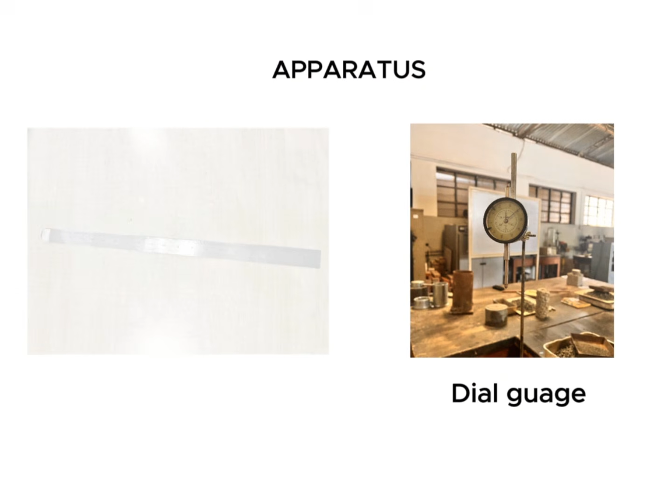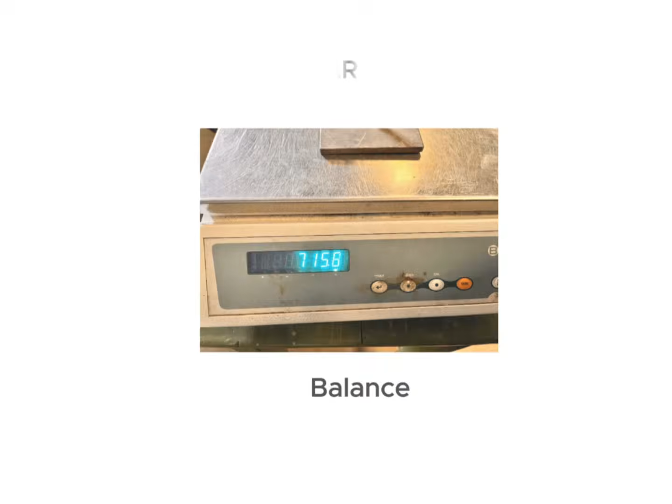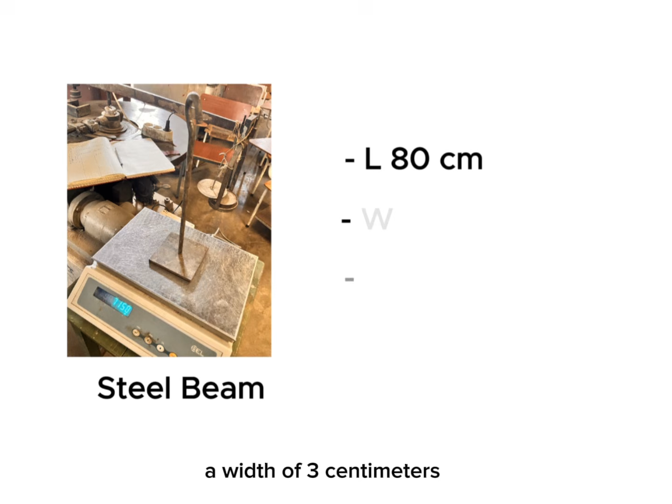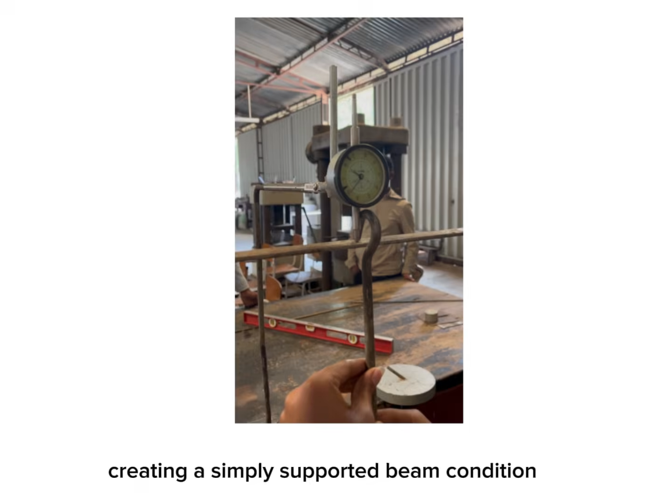Simply supported beam with central point load. To begin the experiment, a mild steel beam with a length of 80 centimeters, a width of 3 centimeters, and a thickness of 3 millimeters was selected for testing. The beam was placed on 2 supports at both ends, creating a simply supported beam condition. The supports were carefully aligned to ensure stability throughout the experiment.

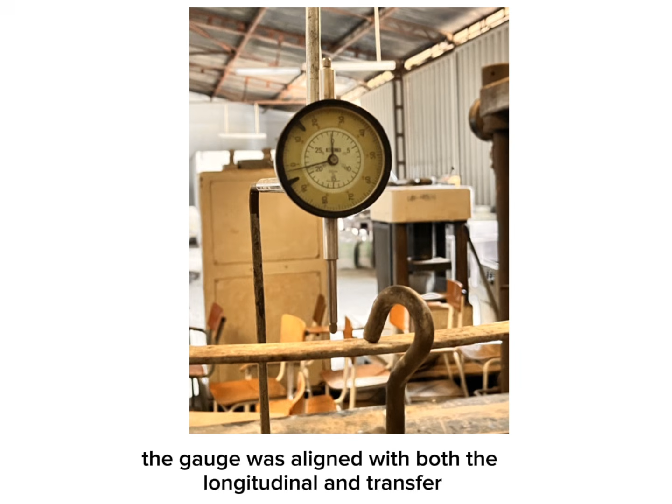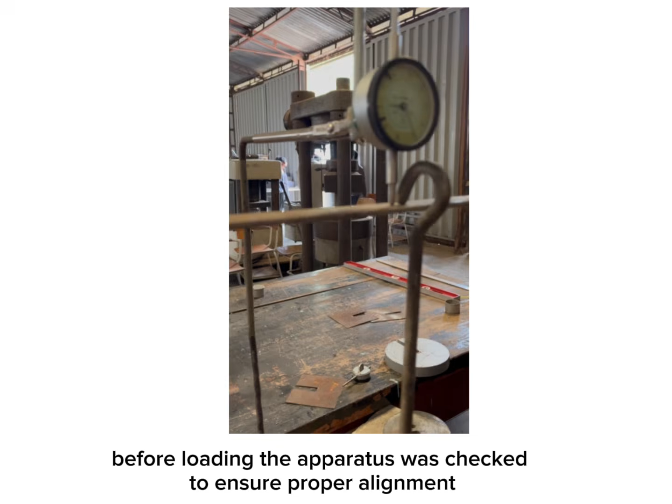Next, a dial gauge was positioned precisely at the center of the beam span. The gauge was aligned with both the longitudinal and transverse center lines of the beam to accurately measure the vertical deflection. The loading hook was also positioned at the center so that the applied load would act exactly at mid-span. Before loading, the apparatus was checked to ensure proper alignment and to minimize measurement errors.

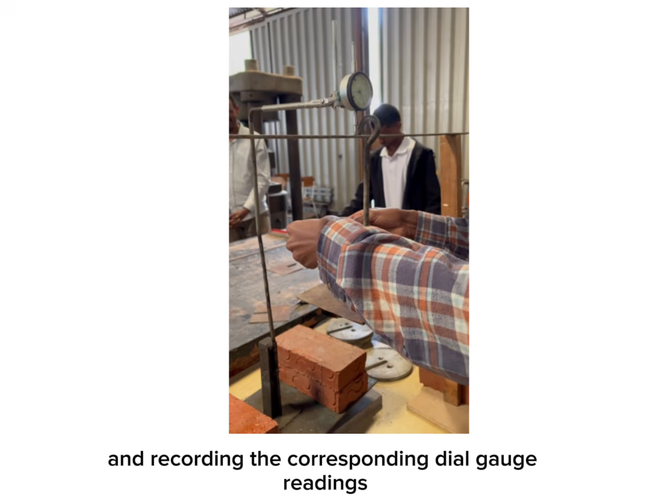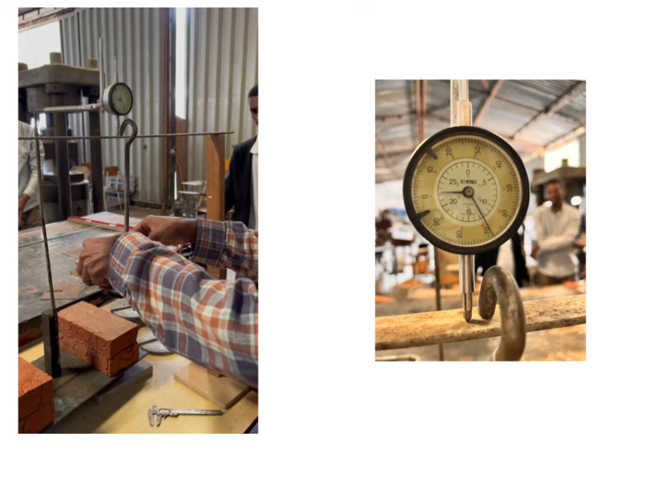The experiment was then carried out by gradually applying loads at the center of the beam and recording the corresponding dial gauge readings. For the first loading stage, a load of 1.0469 kilograms was applied. After the beam stabilized under the load, the dial gauge reading was recorded as 22 plus 68.9 divisions. The load was then increased by adding an additional 1 kilogram, bringing the total load to 2.0469 kilograms. The resulting dial gauge reading was recorded as 20 plus 37 divisions.

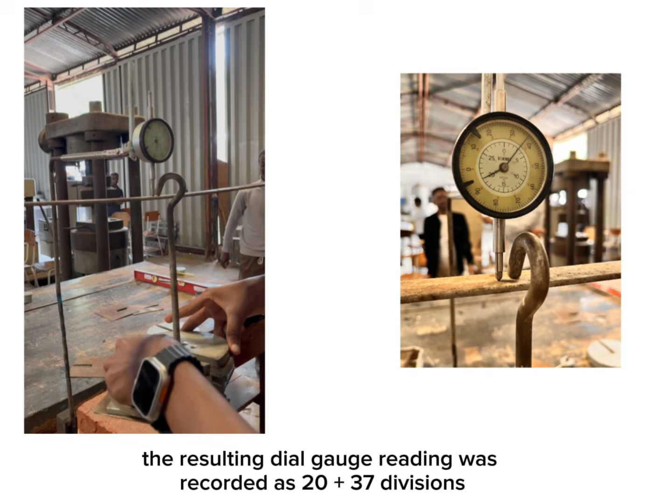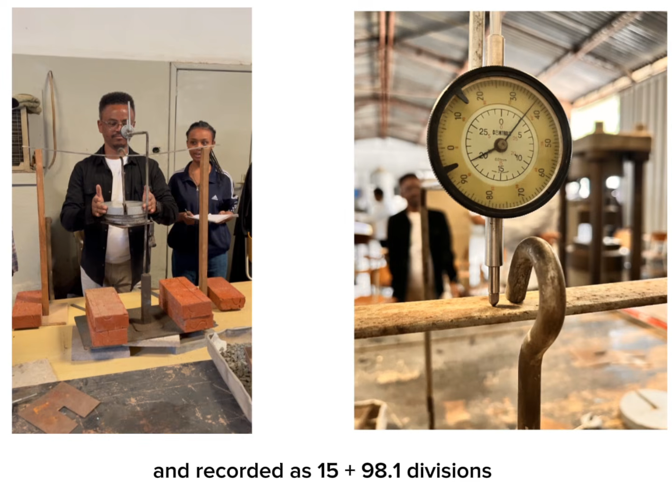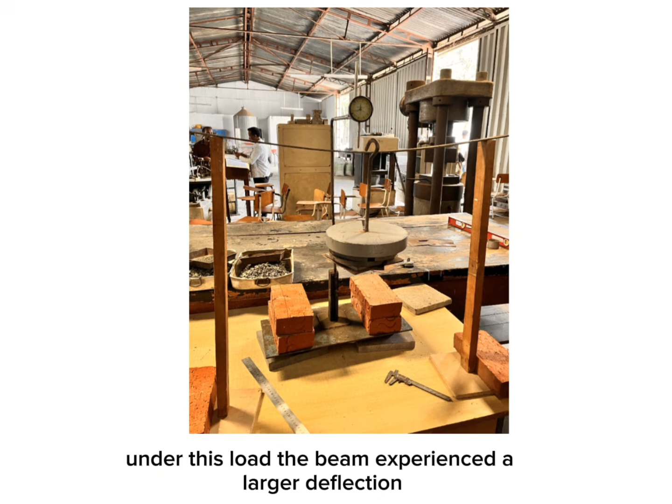For the third loading stage, an additional 2 kilograms were added, increasing the total load to 4.0469 kilograms. The dial gauge reading was observed and recorded as 15 plus 98.1 divisions. The loading process continued by adding 4 more kilograms, resulting in a total load of 8.0469 kilograms. Under this load, the beam experienced a larger deflection, and the dial gauge reading was recorded as 8 plus 50 divisions.

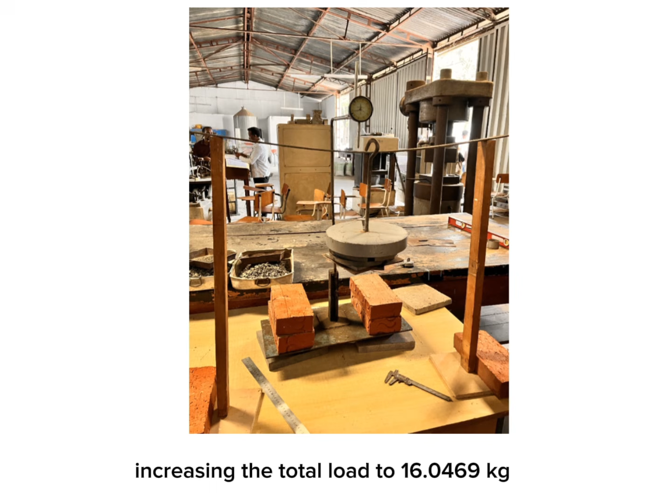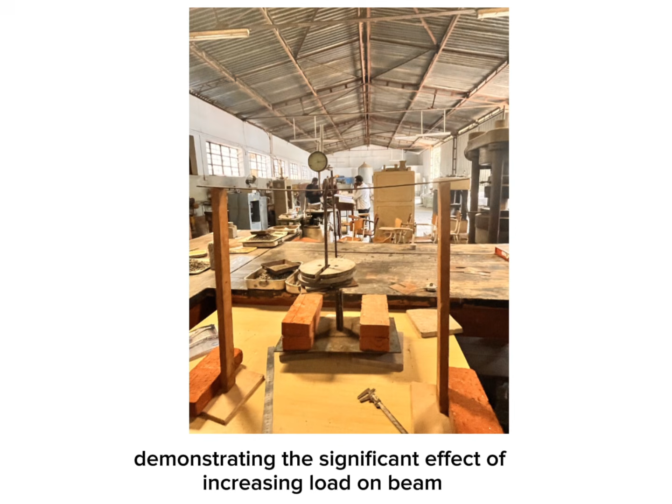Finally, an additional 8 kilograms were added, increasing the total load to 16.0469 kilograms. At this stage, the beam deflected beyond the measurement range of the dial gauge. This indicated that the beam had reached a deflection greater than the instrument could accurately record, demonstrating the significant effect of increasing load on beam deformation.

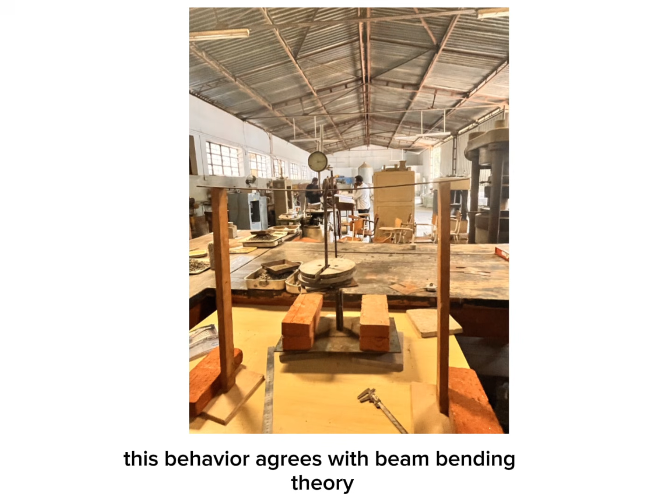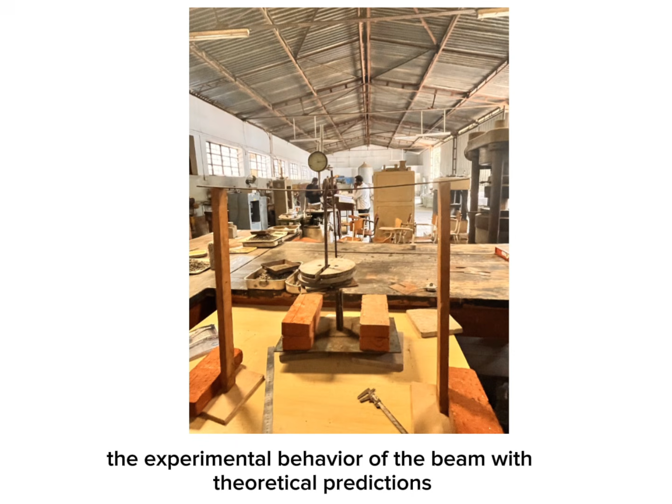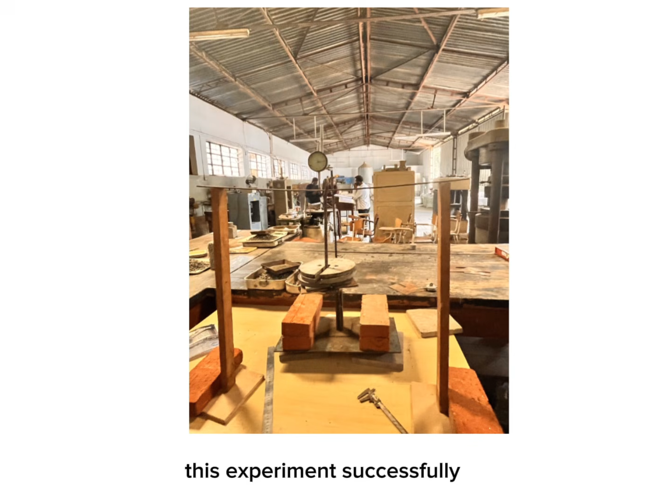Throughout the experiment, it was observed that as the applied load increased, the beam deflection also increased. This behavior agrees with beam bending theory, which states that deflection is directly related to the magnitude of the applied load within the elastic range of the material. The collected measurements were later used to compare the experimental behavior of the beam with theoretical predictions and to evaluate the accuracy of the beam deflection equation for a simply supported beam subjected to a central point load. This experiment successfully demonstrated the relationship between load and deflection and provided practical insight into the structural behavior of beams under bending loads.

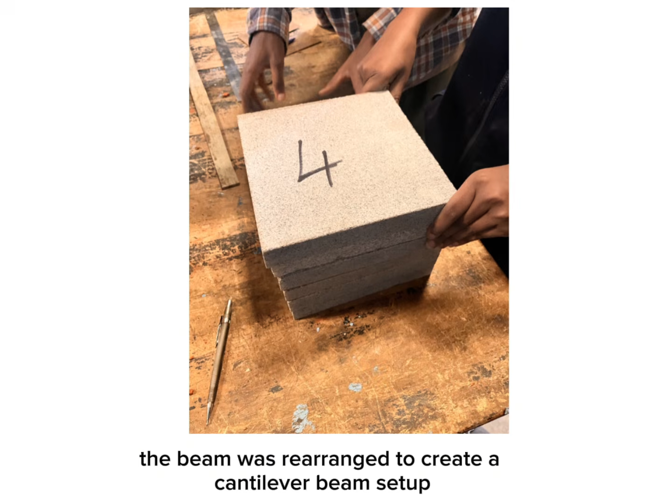Cantilever beam with endpoint load. After completing the simply supported beam experiment, the beam was rearranged to create a cantilever beam setup. A steel beam with a total length of 80 centimeters, a width of 3 centimeters, and a thickness of 3 millimeters was used. Approximately 40 centimeters of the beam was rigidly fixed between supporting blocks, while the remaining 40 centimeters projected outward as the free cantilever span.

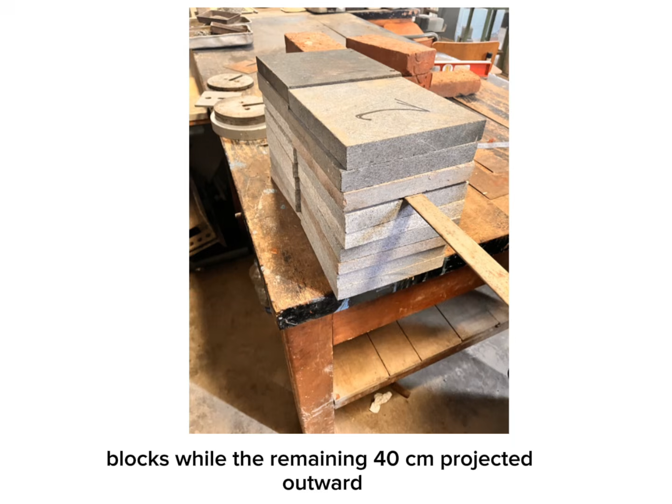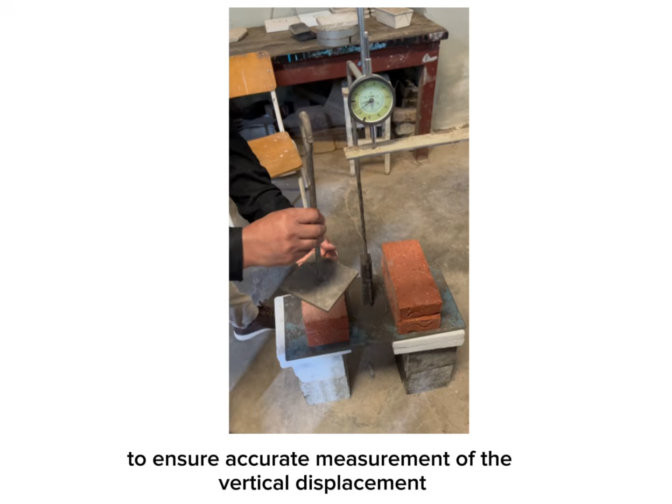To measure the beam deflection, a dial gauge was installed near the free end of the beam. The gauge was positioned along the center line of the beam width and approximately 5 centimeters from the free end. The loading point was also located at the same position to ensure accurate measurement of the vertical displacement caused by the applied load. Before applying any load, the initial dial gauge reading was recorded as 21 plus 63.3 divisions. This reading served as the reference point for all subsequent measurements.

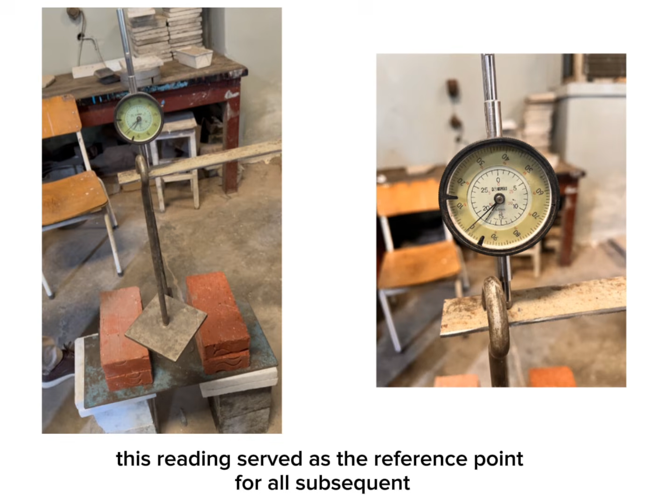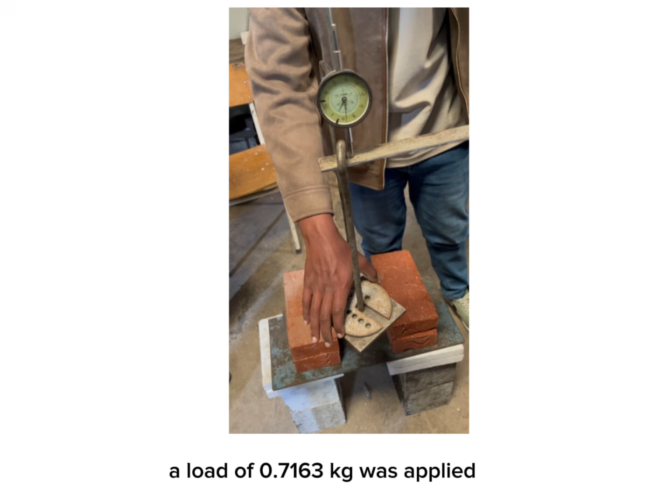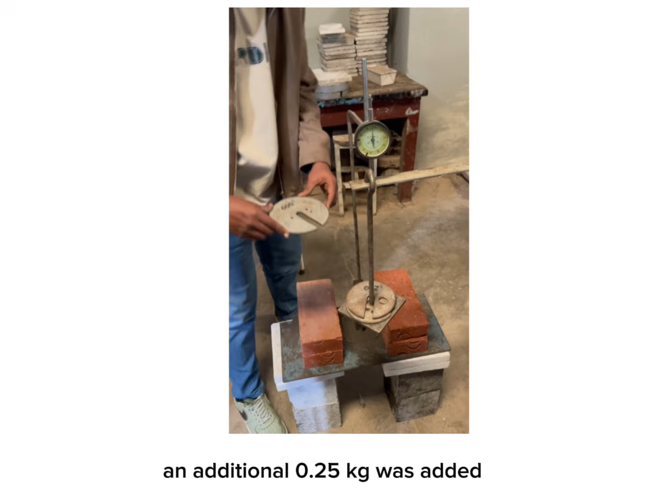The experiment was then performed by gradually increasing the load at the free end of the cantilever beam and recording the corresponding dial gauge readings. For the first loading stage, a load of 0.7163 kilograms was applied. The beam immediately showed a measurable downward deflection, and the dial gauge reading decreased to 18 plus 99.6 divisions. For the second loading stage, an additional 0.25 kilograms was added. As expected, the beam deflected further under the increased load, and the dial gauge reading became 16 plus 24 divisions.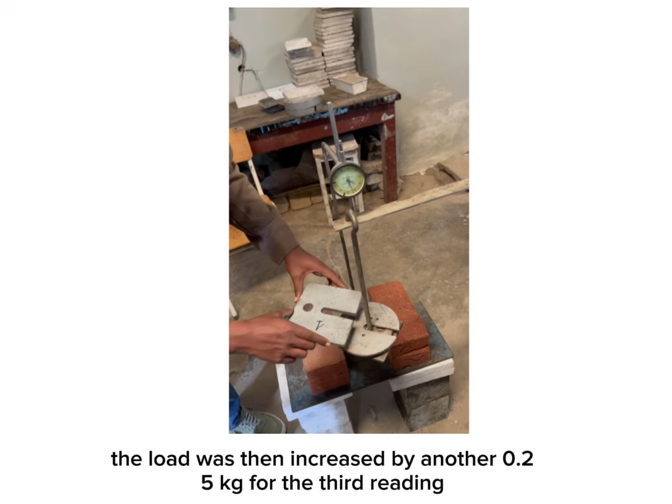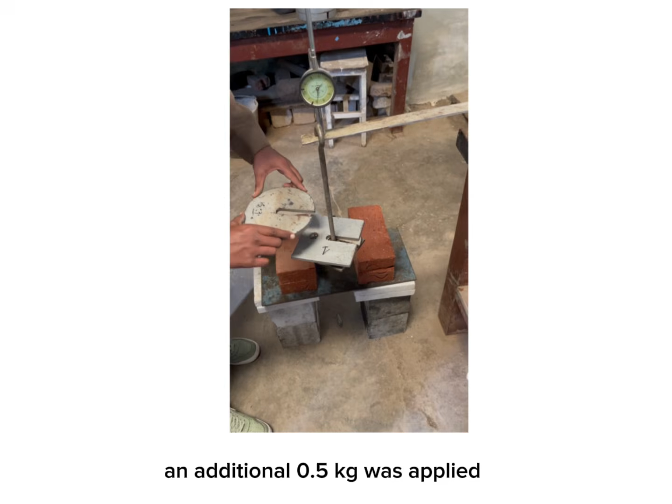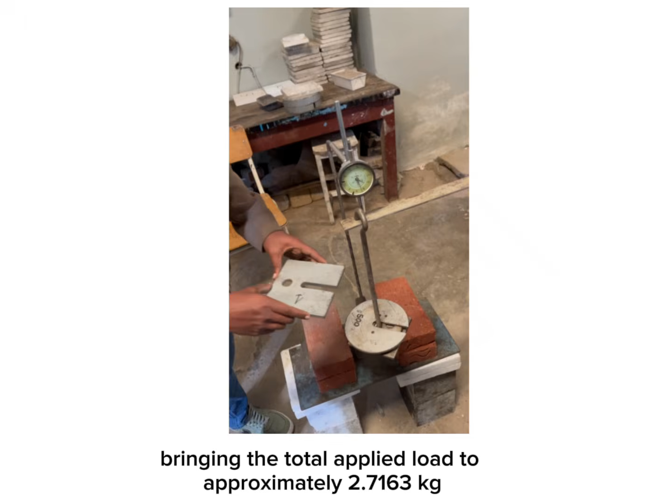The load was then increased by another 0.25 kilograms for the third reading. The resulting dial gauge measurement was recorded as 14 plus 37.2 divisions, showing a continued increase in beam deflection. For the fourth loading stage, an additional 0.5 kilograms was applied. The total load on the beam increased significantly, and the dial gauge reading dropped to 11 plus 83.8 divisions. Finally, an additional 1 kilogram load was added, bringing the total applied load to approximately 2.7163 kilograms. Under this loading condition, the dial gauge reading was recorded as 5 plus 89 divisions.

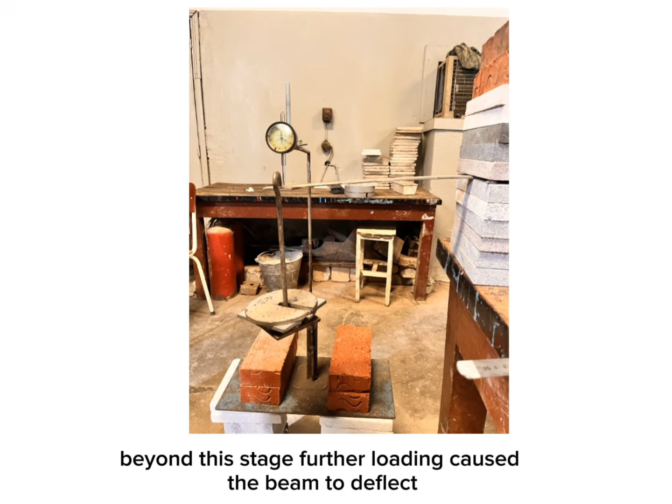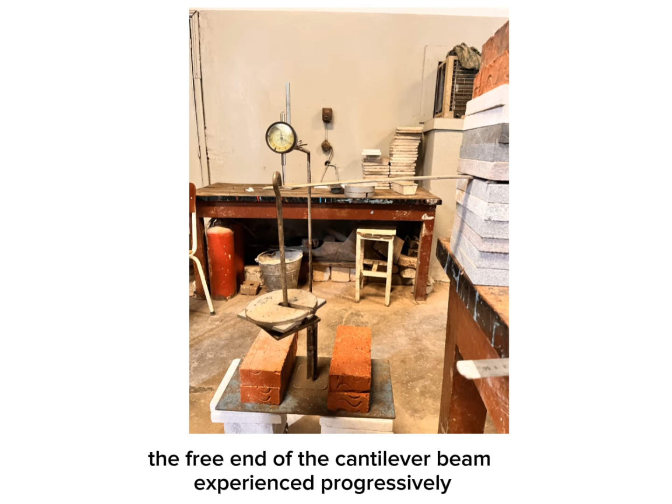Beyond this stage, further loading caused the beam to deflect beyond the measuring range of the dial gauge. The displacement became larger than the instrument could accurately record, indicating a substantial increase in beam bending under the applied load. Throughout the experiment, a clear relationship between load and deflection was observed. As the applied load increased, the free end of the cantilever beam experienced progressively larger deflections. This behavior is consistent with the principles of beam theory and demonstrates the sensitivity of cantilever structures to loading at the free end.

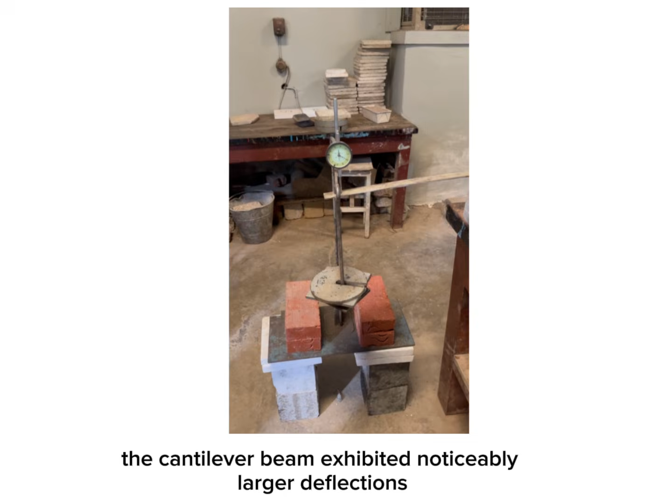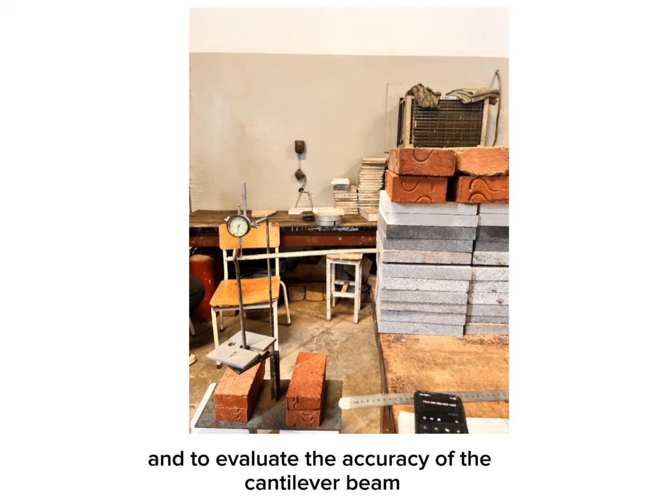Compared to the simply supported beam tested earlier, the cantilever beam exhibited noticeably larger deflections under relatively smaller loads. This is because one end of the beam is completely fixed while the other end remains unsupported, creating a structural condition that is more susceptible to bending. The recorded measurements were later used to compare experimental results with theoretical predictions and to evaluate the accuracy of the cantilever beam deflection equation. Overall, the experiment successfully demonstrated the behavior of a cantilever beam subjected to an endpoint load and provided a practical understanding of structural deflection under bending forces.